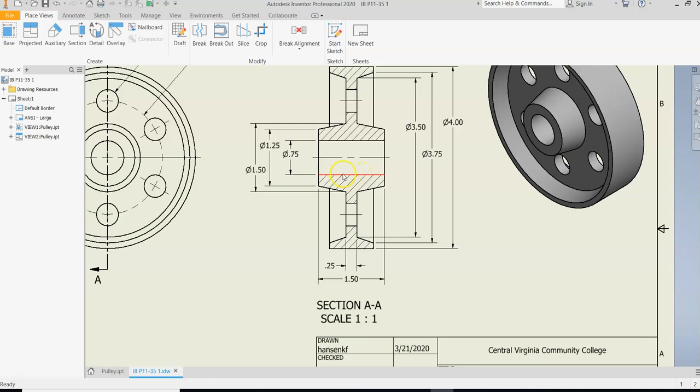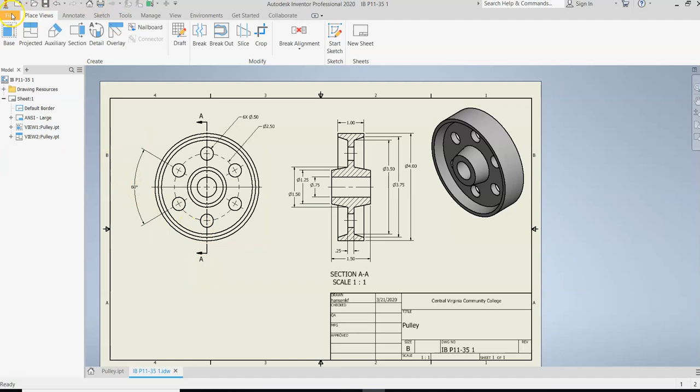Just to go back, I'm not going to go over this - I don't know if it was in the second video or not, but I did have this dimension drawn incorrectly on the first sketch. So I made that change and made this dimension here 1.5 inches. I'm going to go back through and show you how to put those center lines on this part, and back it up to where I start this whole video. I just wanted to show you from the beginning what this part is going to look like. Some of you can just see that and know what to go from here. For everyone else, I'm going to walk you through each step individually.

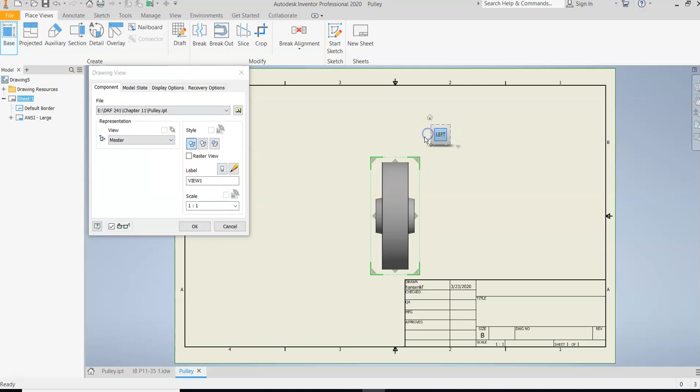So I'm going to start with the standard D-size title block, and I'm going to go to Edit Sheet and switch that over to a B-size sheet of paper. When I bring in this view, because it's rotated, I'm going to want to flip that around and bring in my front view, and I do need my isometric, so I'll project that over here in just a minute.

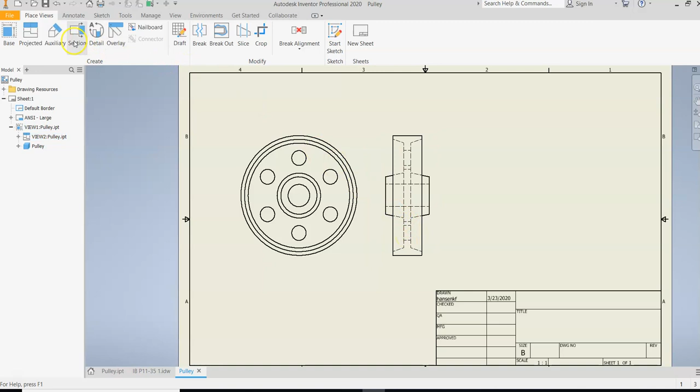Now, what's different on this drawing is this is called a section drawing. When you create a section drawing, it means you're going to be splitting the part in half and showing the inside components. Not all of the parts shown here can be dimensioned from the front view. If we do a right side view, there are some key features that are hidden, specifically this dimension right here - if you were dimensioning that, you'd have to go to a hidden line, and that goes against our ANSI rules for dimensioning. So I'm not going to do that. We're going to create a section.

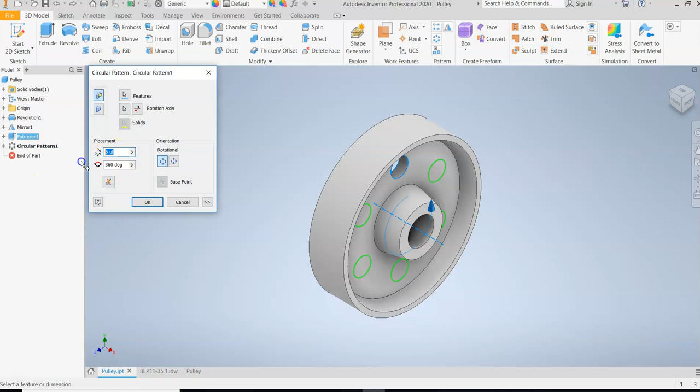Before we get too far into this, I should have fixed my little pulley drawing here. We do need to change the number of hole patterns - you guys had five holes on this feature, it did look like this. So looking at that drawing, that's what it looked like. You can see when you go into the pulley drawing and make those changes, it does update on your drawing. So you do need to go back to your pulley drawing and make that 6 holes instead of 5.

The reason we're doing that is because it said so, and I needed to go ahead and set up my center lines. I want to get that done first. So I'm going to look at the textbook - if you're following along, we're looking at page 1132, where you're going to be applying the center lines for this. I always like to use a good rule of thumb: start with your center lines first and then work from there to your dimension.

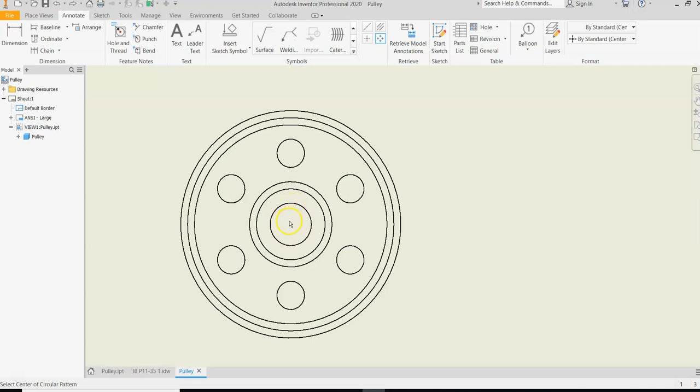So this centered pattern is what we're going to be using. When you click on centered pattern, the first thing you want to do is point to the center of your circle, and then point to each one of the center lines in that pattern. I'm just going through each one of these, making sure I click the last one. Here's the thing: at the very end, after you click the last circle, right click and hit create, and that's going to place those center lines on there.

The center line that's given to you at the beginning, you can click on that center line, and whenever you see those green dots, that's the edit mode, so you can change the center line. Now for this one, I'm probably not going to go too far because I don't want to create a solid line over top of that center line for that hole. So I'm going to extend that center line out and then leave just a little space there in between, just kind of pull that out to the side.

So I've got my center lines drawn out, and now I'm ready to cut. Oh, you know what? I don't need this one. I'm getting ready to cut a section. So with that section being cut, that's going to change a little bit.

So let's go ahead and cut that section. When we cut a section, it creates what's called a cutting plane line. The cutting plane line is a line that cuts through and shows where that slice is happening on your part. It uses two arrows at the end to show the line of direction, and it shows how you're looking into the part.

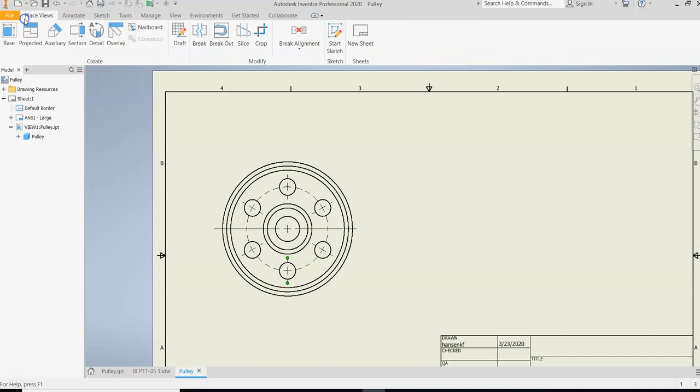So when you use the section command, let me switch over here. We're going to be using, make sure you're under place views. We're going to click on a section, and we're going to have to highlight the box around the view that we're using. You just click there one time with your left mouse button, and that tells Inventor that this is the view you're getting ready to cut a section.

So what I'm going to do now is point to the center. I'm not clicking yet, so don't click. I'm just pointing, getting my pointer lined up, dragging my mouse, not selecting a point yet. I'm just getting that little dotted line to extend out past the point of the circle.

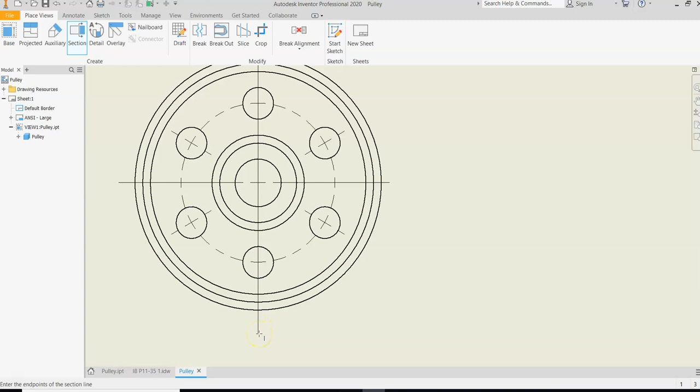We typically go about 1/2 inch. So I'm just going to bring that line out. There's no way for you to know exactly where 1/2 inch is. It's just out of time and experience looking at these section views and drawing it. There's no need to have a cutting plane that's way out here - doesn't make any difference. But if you put the cutting plane line on the edge right there, it's going to give you a distorted view on your section.

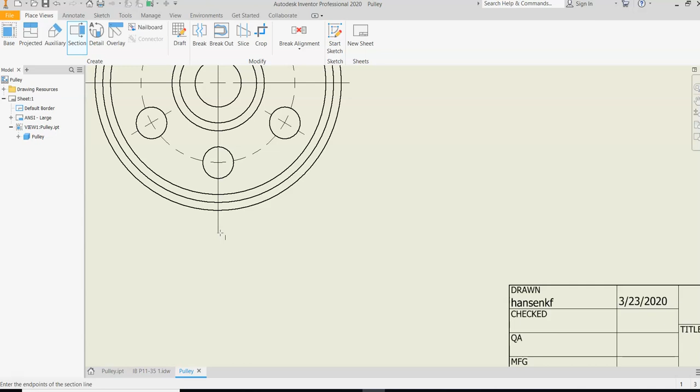So we always go out past the object and just kind of eyeball what a half of an inch might look like. So I'm going to click right there - that was my second click. The first click was at the top, the second click was down here at the bottom.

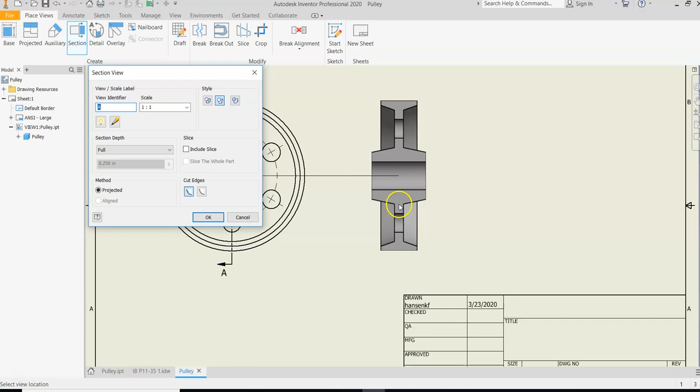And now we're going to right click and hit continue, and that's going to bring up my section view. So when I bring the section, you can see the A down there changing left to right. There's no point to give a left side view, so I'm going to make my right side view into a section. I'm going to pull that section over to that view, click right there, and there is my section view.

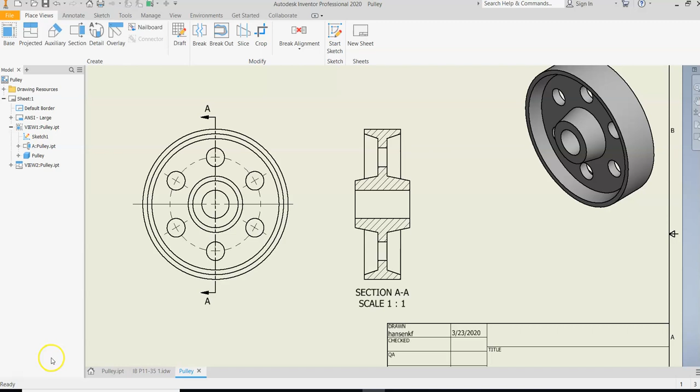So from here, the last thing I'm going to do is go ahead and do my last projected view, and that is my isometric view over on the right. So I'm going to hit create there, right click that, change that view to shaded, and there we go. So what I'm going to do now is finish putting center lines, go put some dimensions on here - the ones I think you should have no trouble with - and then I'll come back and wrap up some of the other dimensions.

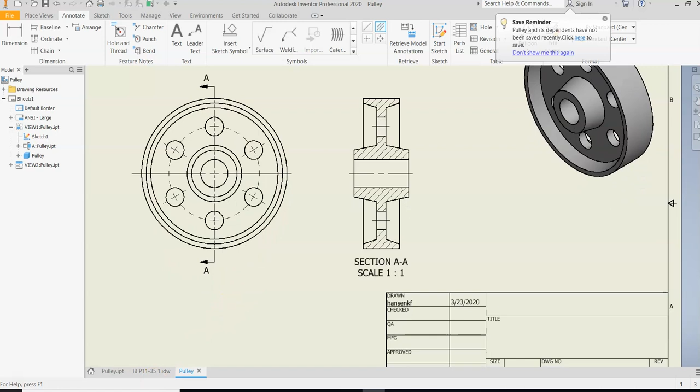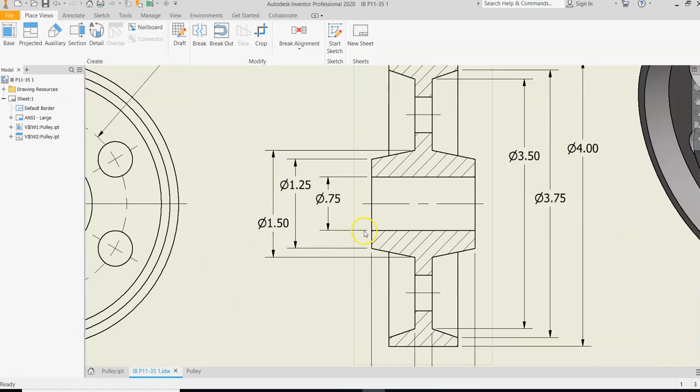So if you want, you could have right-clicked on this view and retrieved the model dimensions or the model annotations. If you did the linear diameter dimensions on the pulley drawing, you could get those, but you do need to rework them. When you put dimensions on a section view, you need to make sure that they're staggered. So just pick on the dimension and move those to make sure they're staggered - none of your dimensions should ever be in line with each other.

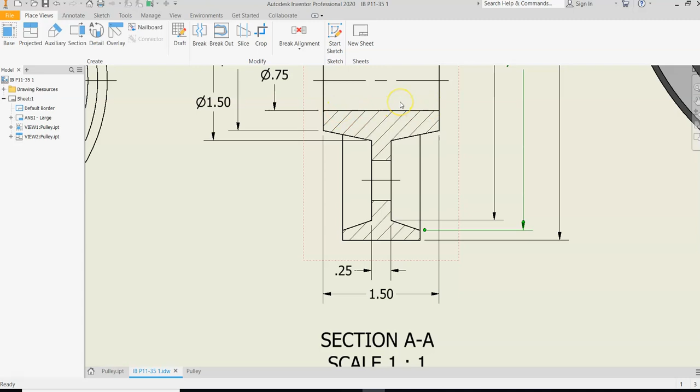As you're dimensioning this 1.5 dimension, I did not like the dimension on the part. One of the rules says to always avoid putting dimensions on the part. So I pulled the 1.5 inches down here on the bottom. You could also pull it up to the top - either is fine. This section A-A does move.

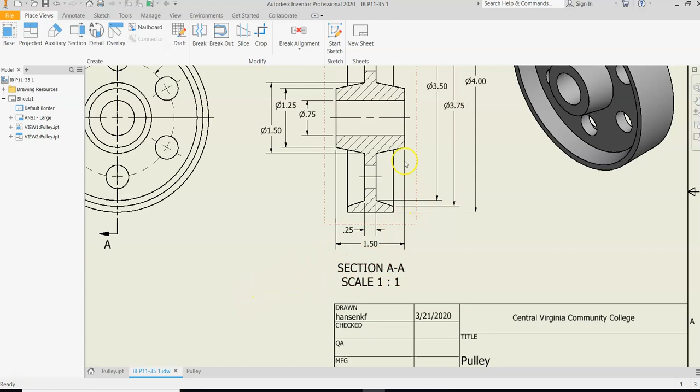What you will do is when you point to it, and when you see the little move box pop up, you can then move that down. You should not have this closer to the part and then have the dimensions pull through it. The section note is always down below it. So you should be able to put those dimensions on - let me know if you have any issues with those.

And the other two things we need to get over here on this view is just simply using the annotate command to get the leader, the angle. So just pointing to those two, pull that 60 degrees out, and I'm always looking for where that little dotted dimension line pops up, so you know that you are in the right place.

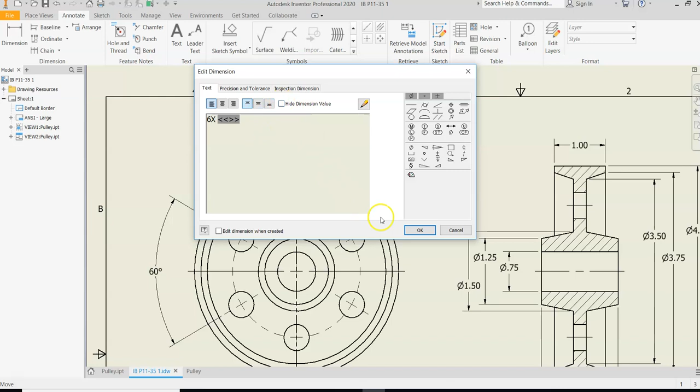The last one I'm going to do is the dimension for this 1/2 inch. When it's that, it's a 1/2 inch dimension. ANSI standard is to now show what the quantity is - so this has 6 of them. So you put a 6x for 6 times, and then unhide that dimension value, and then you will have the correct notation for that. So this is basically the end of this problem.

Make sure you're saving it as P11-35 1. Remember, this is a sample drawing. This is part of your graded practice drawings, and you've got this here to go by, so try to use this as a guide as you are completing this problem.